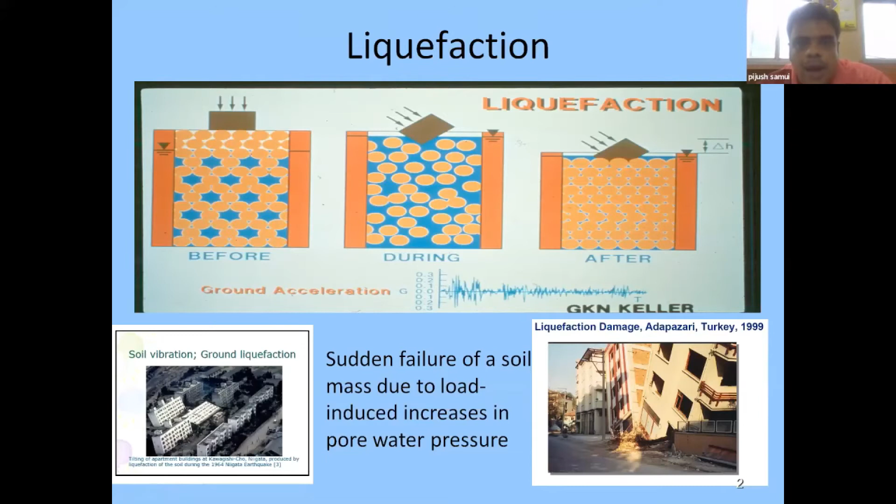Now, for liquefaction, generally we use different in situ test techniques for determination of liquefaction of the soil. Generally, we use the cone penetration test (CPT) as well as the standard penetration test and the multi-channel analysis of surface waves that gives the shear wave velocity profile. So generally, all these tests are used to determine the soil liquefaction for a particular place.

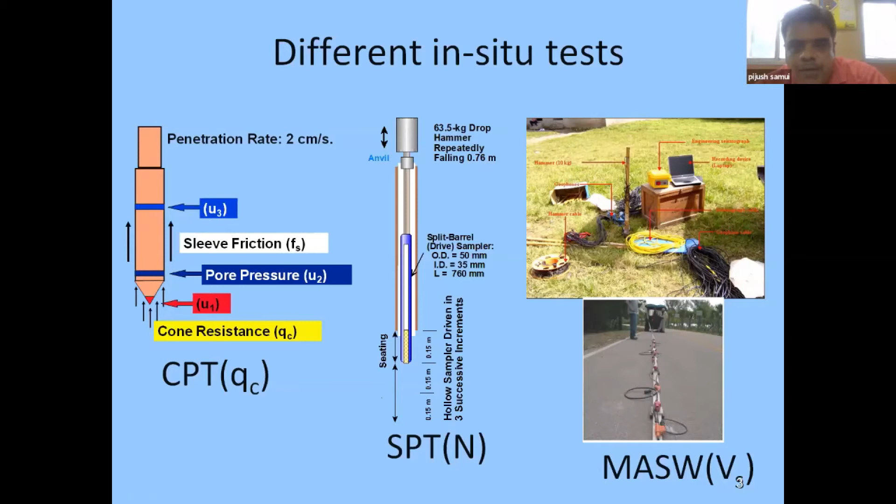Now, the first technique I will use is called support vector machine. So what actually are we doing in this technique? Basically, the liquefaction problem is a classification problem. That means there is two-class data. For example, this data is liquefiable soil and this data is non-liquefiable soil, and we want to classify the data between these two. You may get 100 data sets, and some data is liquefiable and some is non-liquefiable. Now, how to classify this data set?

So if you consider a two-dimensional plane, you can construct a plane here. And the width between these two planes is called the margin width. If you apply common sense, you can easily see that if the distance between these two planes is more, then as a classifier it will be good. So SVM tries to make the distance between these two data sets, liquefiable and non-liquefiable, more; SVM maximizes the margin, and these two classifiers are given by some data called support vectors.

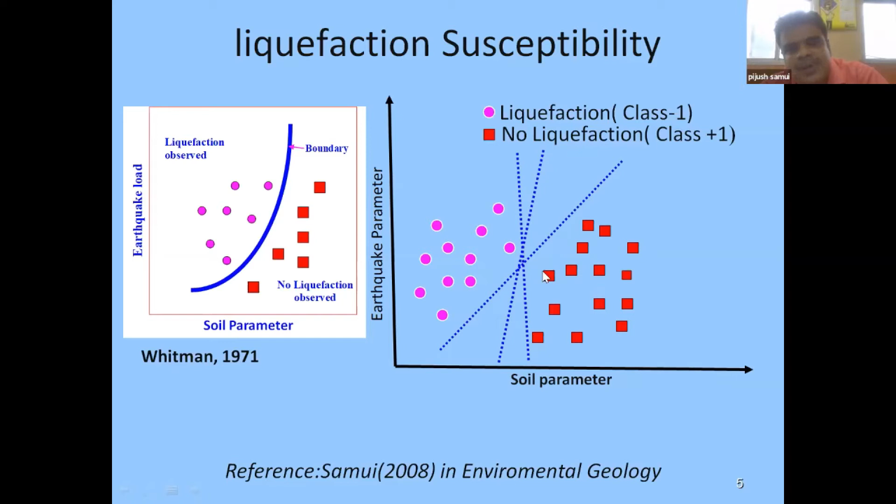Now coming to the motivation of this work. Actually, if you look at Whitman 1971, he gave a boundary between liquefaction observed and no liquefaction if you plot soil parameter and earthquake load. So coming to the SVM, there are two data: one is liquefaction, another is no liquefaction. You can construct so many lines. So the question is which line you will use for the final prediction. As I have already told, it will use the one which maximizes the margin, because if the margin is maximized, it will be good for the final prediction. So that technique is used to determine whether soil is liquefiable or not.

Now coming to the liquefaction problem, it depends on two parameters: one is the earthquake parameter and the other the soil parameter. So this is the input of the model, and the model will give you two outputs: +1 and -1, where -1 means liquefaction and +1 means no liquefaction. The earthquake parameter, as we already know, is the cyclic stress ratio, determined by the well-known Seed and Idriss approach by using this formula, called the CSR.

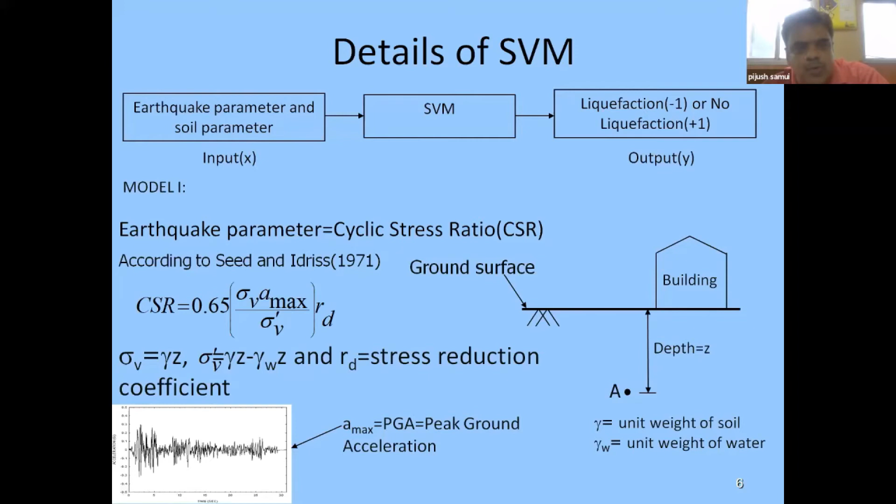And the second point is, what is our soil parameter? The soil parameter I have taken, as I have already told, is the cone resistance value. So if you come to the SVM, there is a data set. X is our input and Y is the output. Actually there are two data sets in X: one is the cyclic stress ratio and QC, and Y is whether the soil will be liquefied or not liquefied.

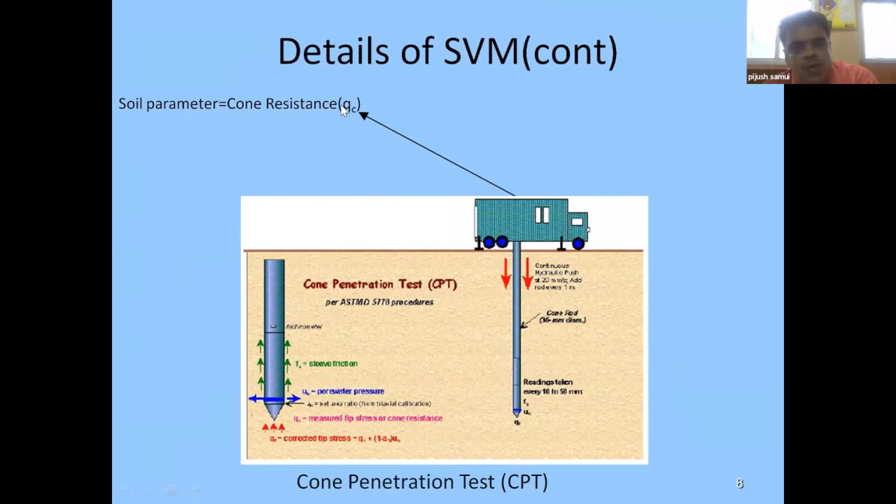Now this is the soil parameter. We are getting the cone resistance value, which is well known in geotechnical engineering. We all know what the cone penetration test is; I am not going into the details. That gives the cone resistance value, which is the input of my SVM model.

Now, I have taken a data set from the Chi-Chi earthquake in 1999. Around 134 data have been used to develop the model. The data set contains information about the cone resistance, CSR, and peak ground acceleration, as well as the status of soil. Status of soil means whether the soil is liquefying or non-liquefying. That data has been divided into two parts: the training data set and the testing data set.

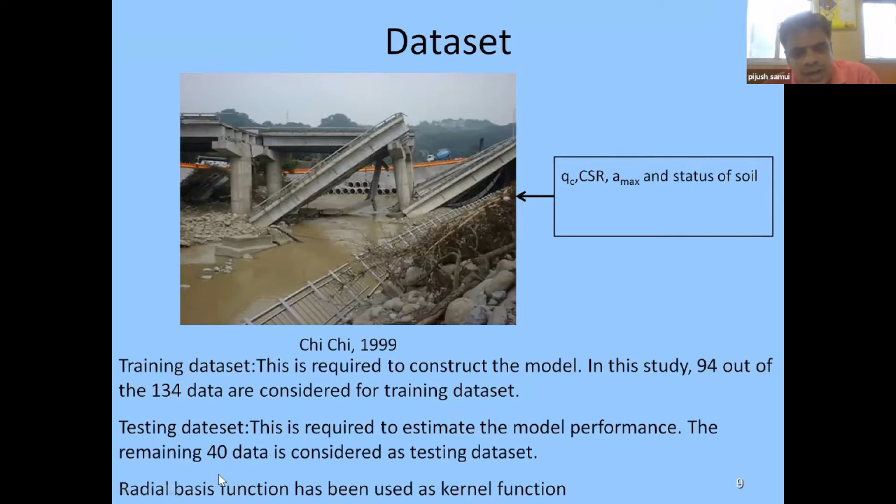So what is the training data set? The training data set is used to train the model, that means to tune the model to get good performance. So it will always have more data. In this study, around 94 data have been used for the training data set. The testing data set is used to verify the model, and around 40 data have been used to verify the model. A radial basis function has been used as the kernel function required to develop the SVM model.

So what are the drawbacks of this model? One is that, if you look at the CPT data, it does not give any soil sample. And if you look at the CSR equation, we require gamma. Gamma means the unit weight of the soil. But CPT does not give the soil sample. That's why we cannot use only the CPT test for development of model 1. So we have to do another test to take the soil sample.

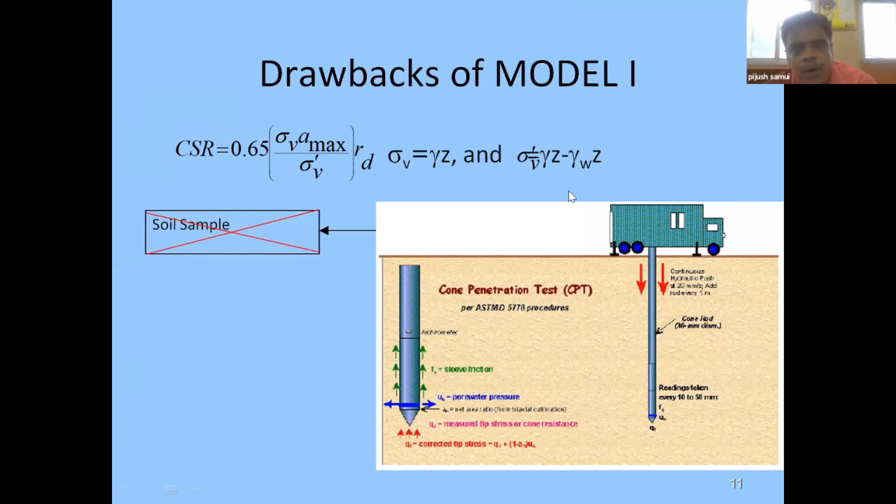And so the performance on the training data set is almost 100%, as I have already told. Now I have used some other data set, not the Chi-Chi earthquake data set, from different parts of the world, and out of 109 global data, only 97 data have been correctly classified, and the remaining data have not been classified. So around 12 data have been misclassified. That means the developed model has the ability for predicting liquefaction of the soil.

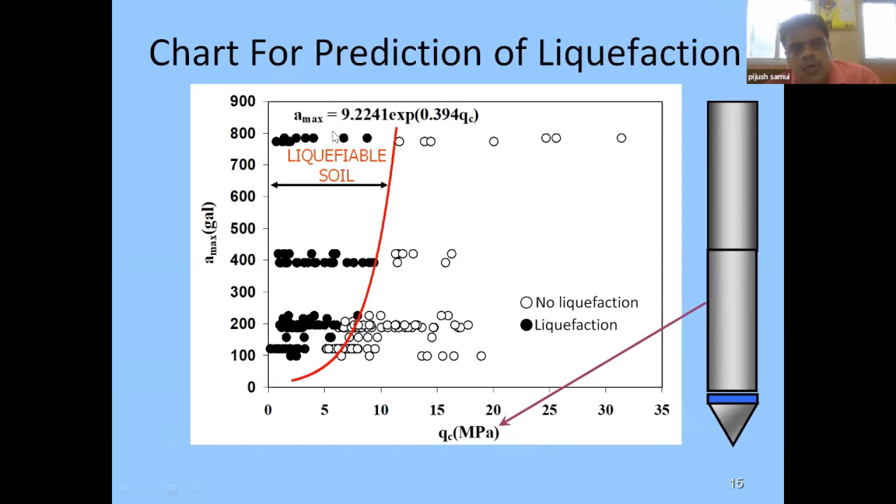Now coming to this, after developing this model, I had to develop a chart between liquefiable and non-liquefiable soil. So the chart is between QC and not CSR, it is the peak ground acceleration. So if you look at this, we can tell that in this zone it is highly possible that soil will be liquefiable. So this is one good thing, that we do not need to calculate the value of the CSR.

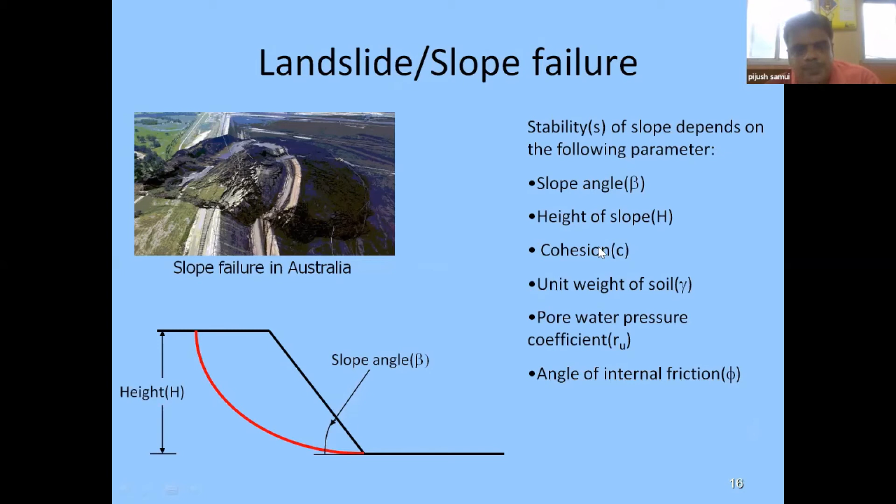Now coming to my second topic, called landslide and slope failure. That depends on different parameters: the slope angle, height of the slope, unit weight of the soil, pore water pressure coefficient, and angle of internal friction. So these are all inputs for a particular slope, and the model will give you the output whether the slope will fail or it will be a stable slope. So this is the same thing. Support vector machine has been used over here also. Actually, this is all our input, and the output is the two cases, failed slope or stable slope.

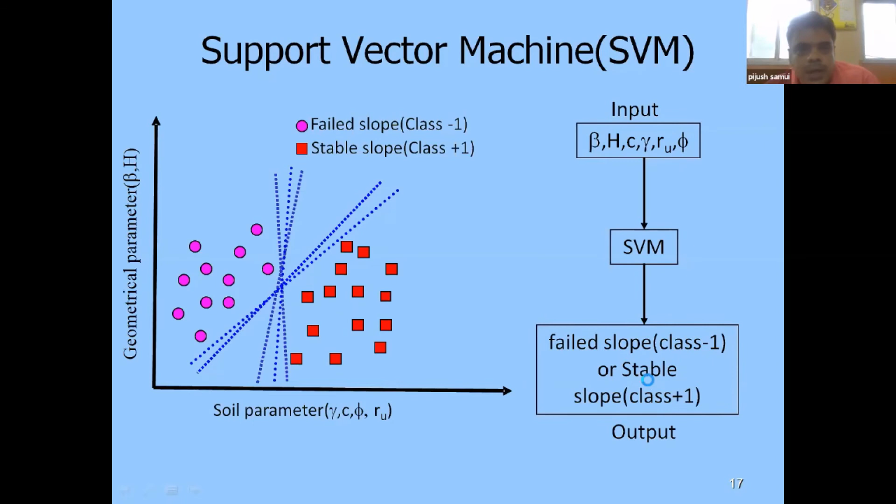So for development of the model, data has been collected around the world. So 12 from Australia, 8 from UK, 8 from China, 6 from Canada, 5 from India, 3 from USA, and 1 each from Japan, France, Spain, Greece and Italy. So all data has been collected, and then the data has been divided into 2 parts, just like the liquefaction problem, training data set. Around 23 data has been.

Sorry to interrupt, Chairman sir. We are running short of time because our panel discussion has started. So please instruct the presenter to close early. Okay, I request Professor Samui to kindly conclude the speech. Within 5 minutes, I will conclude. It was interrupted. Yeah. Sorry to interrupt. Yeah. Okay, no problem, sir.

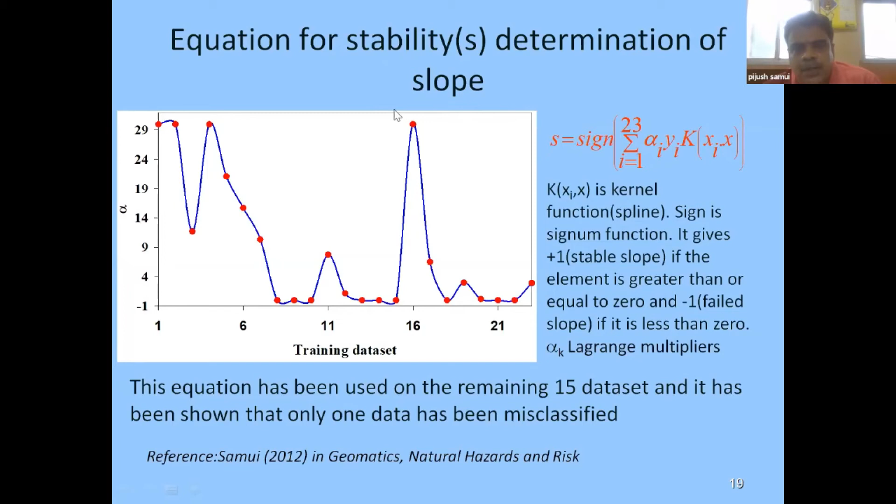Now as time progresses, I am just giving a new concept that people are using nowadays, called big data. Big data means there's a huge amount of data. There are 4 V's in big data: high volume of the data, variety of the data, velocity, that is the frequency of the data, and veracity, the quality of the data. So these 4 V's govern big data.

For example, if you collect all SPT data around the world, there will be a huge amount of data, and every day SPT testing is going on all over the world. So that means every day data will come. So how to model this big data in the geotechnical earthquake engineering problem? That will be a very interesting result.

And coming to this, there's recently one paper published by Cortes et al. Using the big data concept, they have predicted the earthquake magnitude, and that is published in Computers and Geosciences. So it will be very useful for those who want to work in this field of research.

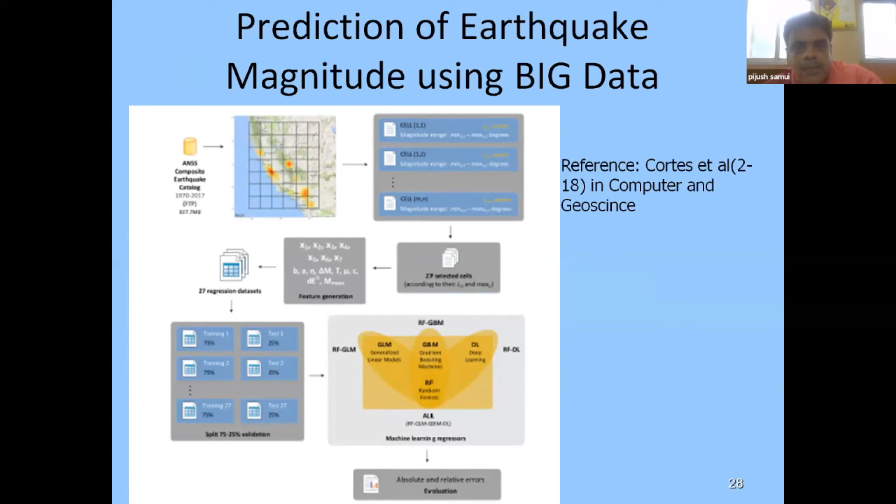Now, coming to the conclusion, actually, the performance of soft computing is very much data specific. That means you cannot tell that SVM is the best model to use for all problems. Only after doing the modeling, you have to check the performance of all models. Then only you can tell which model is the best. The result of soft computing should be analyzed thoroughly, and decisions should be taken based on practical experience. That means you cannot use the soft computing result blindly.

You have to check, you have to visit the site, and you have to decide based on your experience. And the third thing is that it can reduce the cost of the project, because obviously the number of tests will decrease by using soft computing techniques. So automatically the project cost will reduce.